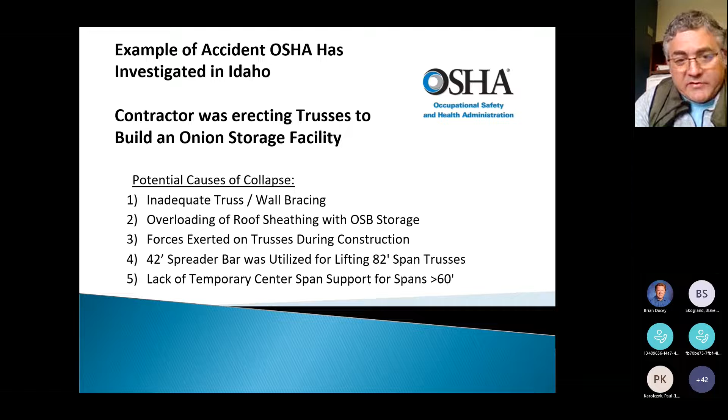The potential causes of the collapse were that they didn't have triangulation in their wall bracing, they overloaded their roof sheathing with OSB, they used a spreader bar that wasn't wide enough for 82-foot spans, and they also didn't have temporary center span supports for the spans.

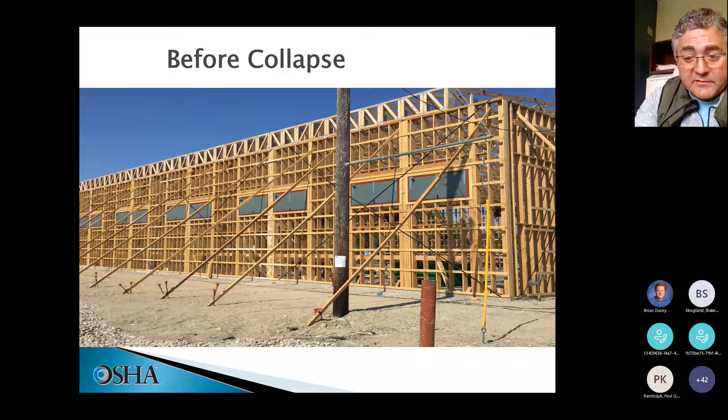This is the after, and for greater perspective, this is the after. For a brief description, there were about 7 people working in this corner of the building. Most of them slid down the structure or crawled around the side. Only one person had a broken hip, so it's not exactly a near miss, but it's pretty close. These guys are lucky that they lived to tell the tale another day.

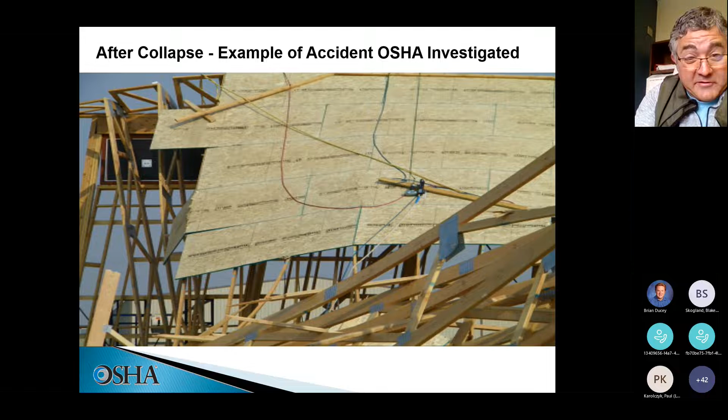So you can see this is a bit of a mess. This is an example of something that we would investigate.

When we have something like that happen, employers are required to report each inpatient hospitalization to us within 24 hours. If you didn't know that, that can be done through our 800 hotline, that's 800-321-OSHA, or you can contact the local OSHA office with jurisdiction.

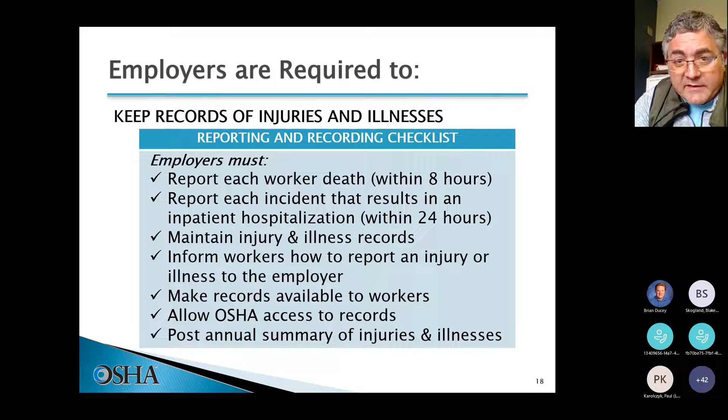Anytime there's a worker death in a worst case scenario, that has to be reported to OSHA or also to a state OSHA jurisdiction. State OSHA jurisdictions, I believe, are consistent with the 8-hour requirement. The DOSH representative could verify this, but that has to be done within 8 hours.

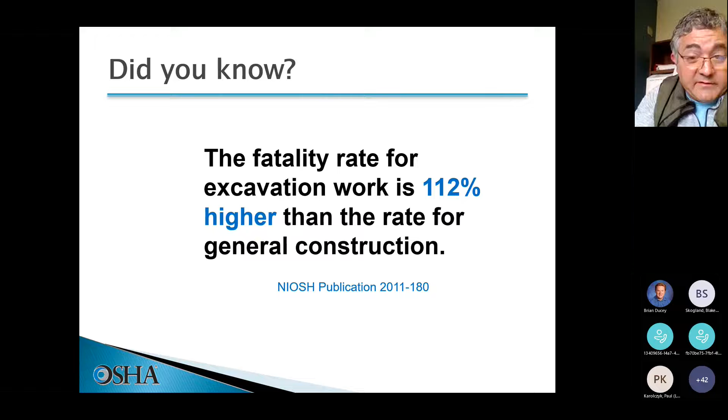So getting to the excavation and trenching portion of the presentation, I'm going to go through these pretty fast because we've got someone from DOSH who's going to talk too. The fatality rate for excavation work is significantly higher than the general rate for construction.

I won't read this whole slide, but note that 271 workers died in trenching or excavation cave-ins over a 6-year period from 2000 to 2006. 488 of those deaths over an 8-year period resulted in, I guess, about an average of 54 per year. 68% of those fatalities were in companies with fewer than 50 workers, and 46% of the deaths occurred in small companies with 10 or fewer workers.

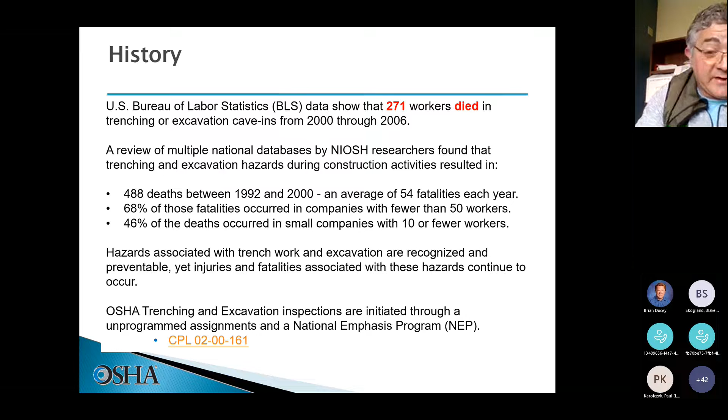OSHA has a national emphasis program, and I have a slide on this, and Blake might follow up on this. The CPL number is 02-00-161, and there is a compliance directive, and I think that has an additional number which I'll reference towards the back.

Some of the common things we hear about when we go out in the field regarding noncompliance are: well, it was just 5 feet deep, or someone was only in it for a minute or had limited exposure time, or that someone was in a hurry.

Other things that we hear are that the trench box or the sloping was not feasible for the site, there was limited access to engineering controls, or that the utility locate was not accurate or completed.

As a brief tangent on that, I once did an inspection on a site where the locate was beyond 21 days expiration, and the contractor hit the gas line while I was doing the opening with the superintendent. That was interesting. Luckily it did not result in an explosion. They were able to call the fire department and resolve the situation, but that was hair-raising.

You want to make sure that there's a competent person on the site to assess cave-in hazards and engineering controls.

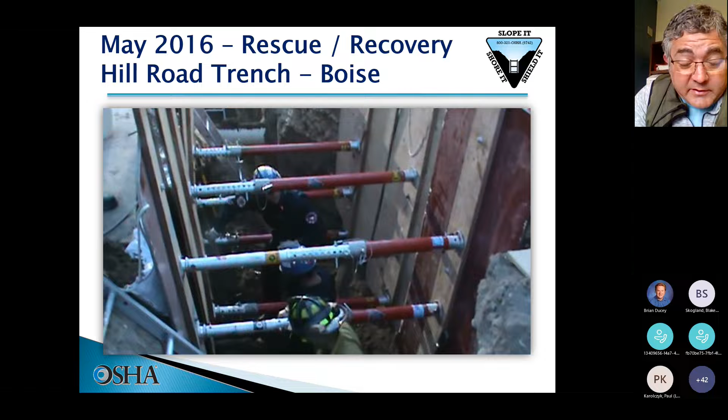This is an after photo of a double fatality that happened on Hill Road in downtown Boise. So they do happen in cities, and in this case this is a rescue crew, and they're trying to rescue the folks that are in this trench here.

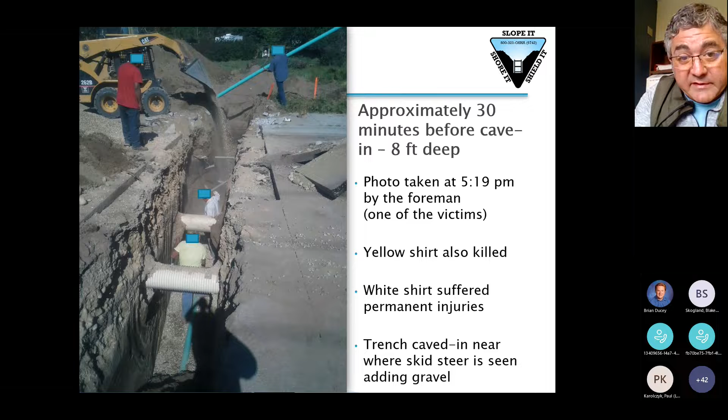I have a series of 3 photos that I'm going to show you that I showed to the DTEC class, to put them in the perspective of what an OSHA compliance officer might be looking at if they're showing up to a site.

This is the first one, and I asked the students, if you're looking in this situation, what do you see? Well, you see that there isn't a ramp or a means of egress or a ladder for this person to get out. The sides may be sloughing off or not properly sloped, and this person is practically being buried by the load.

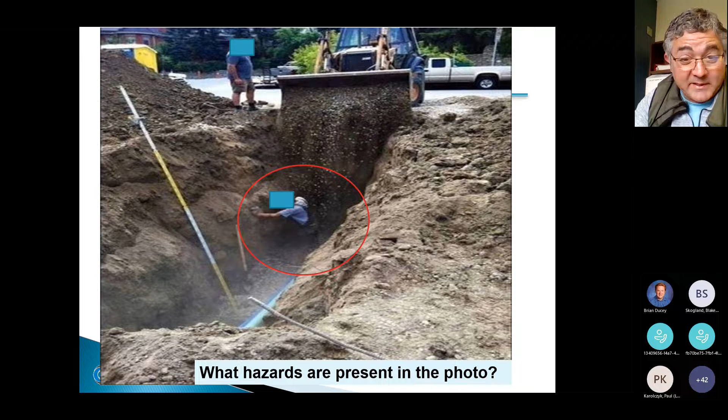So there are a lot of things taking place here. You've got someone standing up top who might be the foreman, who has adequate knowledge as to what's going on. That's going to be the first person the compliance officer wants to speak with, once they get that laborer out of this excavation.

In here, there's some fissuring towards the right-hand side, which might be difficult to see. The soil appears to be a relatively cohesive type, maybe a Class B. If you're not familiar with soil classification, it goes from stable rock to A, being clay or very cohesive, to B, to C being like sand.

But as you go further into this trench or excavation, the slopes get steeper. The difference between a trench and an excavation just has to do with the width of the trench or excavation relative to how deep it is.

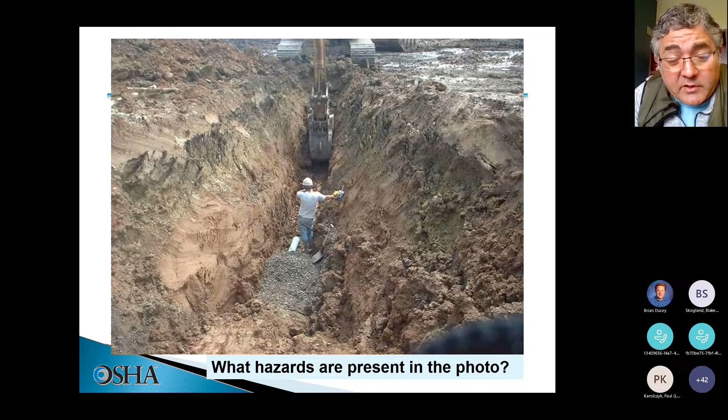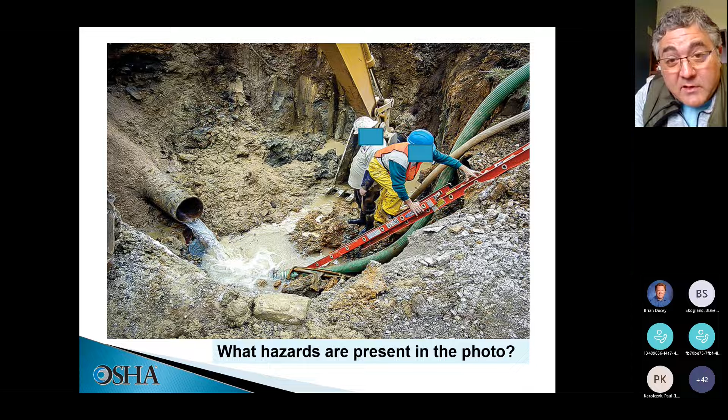The issues in this excavation are that there's patently obvious a bunch of water at its base, and it doesn't look like they have a pumping mechanism—or they may. Actually, it does look like they have a pumping mechanism to get the water out. This could potentially weaken the excavation and make it more susceptible to cave-in.

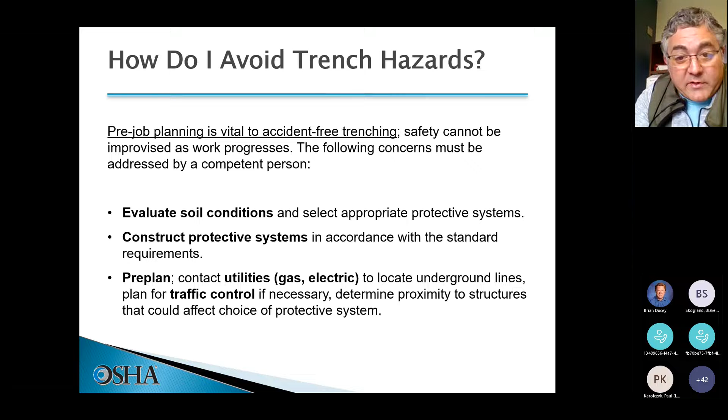So how do you avoid trench hazards? Pre-job planning is important to accident-free trenching. You want to evaluate soil conditions, construct protective systems in accordance with standard requirements, pre-plan and contact utility locate services to locate underground lines, and plan for traffic control if you're in a roadway. You also want to test for low oxygen, hazardous fumes, and toxic gases, especially when you've got gasoline engine-driven equipment running. You want to provide safe access into or out of the excavation.

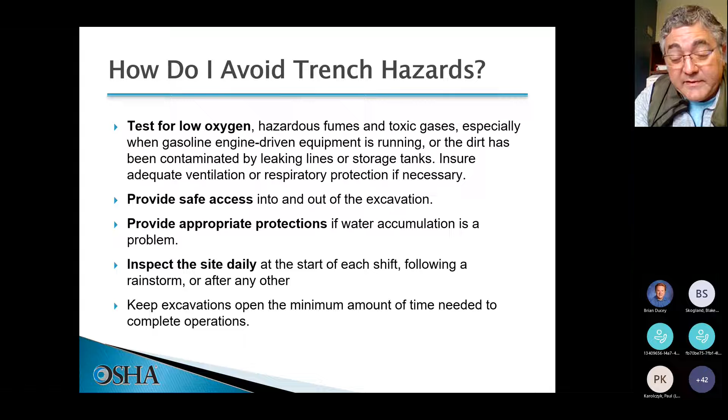Remember that picture where the guy's got a load being dumped on him—there's no ramp or ladder to get out of there. You want to provide appropriate protections if water accumulation is a problem, and make sure a competent person inspects the site daily at the start of each shift, following a rainstorm, or after any other significant event that might affect the cohesiveness or cave-in hazards of that excavation.

A competent person is an individual designated by the employer who is capable of identifying existing and predictable hazards, and hazardous or dangerous conditions involving workers, and who is authorized to take prompt corrective measures to eliminate the hazards. They have to be able to do both: identify problems, and then have the authority to correct them.

Under our excavation standards, the tasks performed by the competent person include classifying soil, inspecting protective systems, designing structural ramps or means of egress, monitoring water removal equipment, and conducting site inspections.

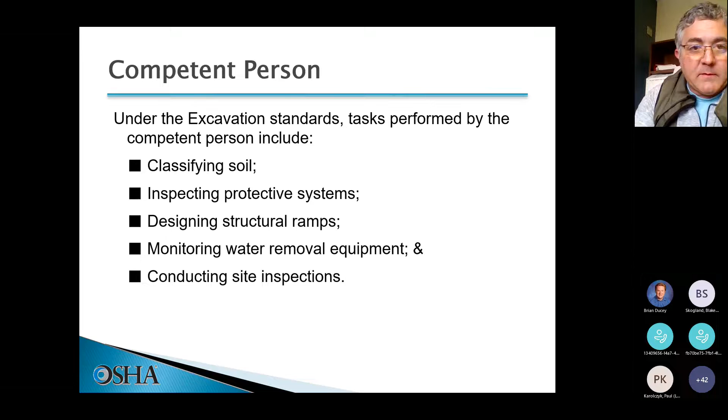So the following slides address cave-in hazards and include photos taken from OSHA enforcement inspections. The industries addressed include residential, commercial, and ag sites.

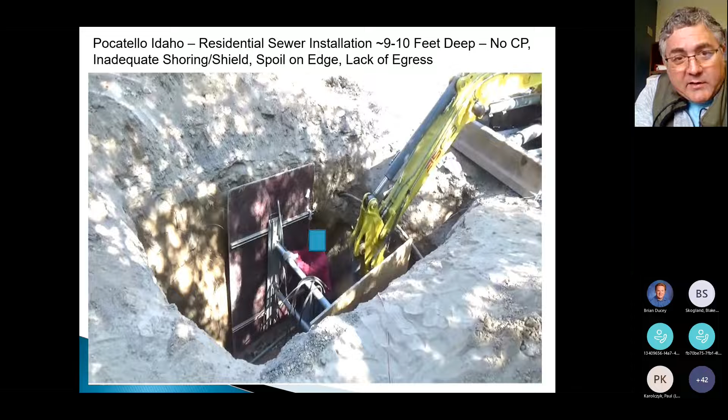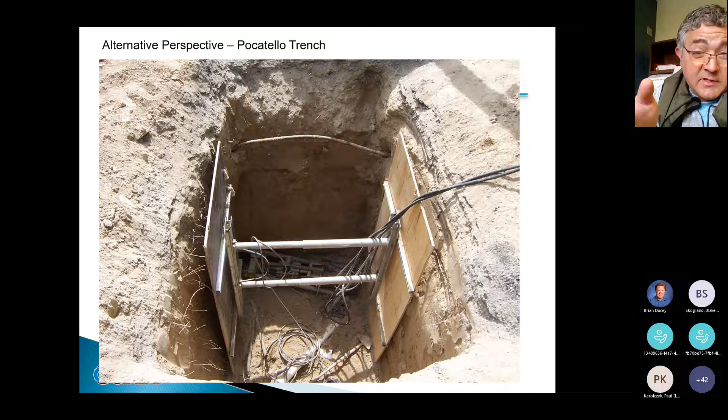There's the slope—or actually the spoil pile—right on the edge here. You can see this worker getting out of the trench; she's like, 'uh-oh, the OSHA guy's here, I better get out.' This is a different perspective. You can see that the opposite sides of the trench are vertical as well, so this is more like a hole, not just a trench. There's a hazard of cave-in from each of the four sides of this work location.

Here you can see the spoil pile, which is significant, right on the edge of this trench. That spoil pile was about 4 to 5 feet high—pretty high, and right on the edge.

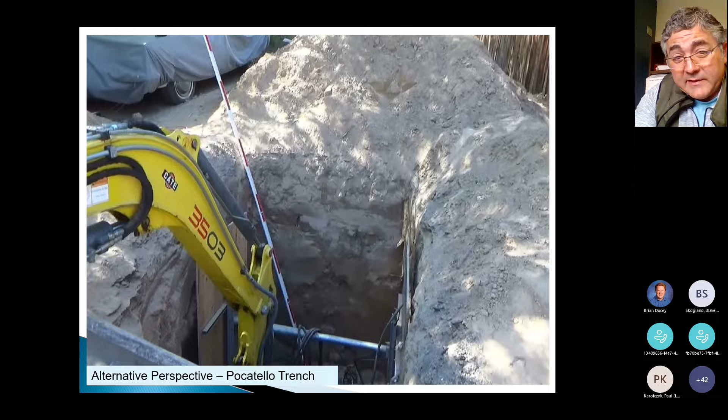This is another excavation on the same site, because they were installing, I believe, residential sewer. It's about 8 feet deep, vertical walls, spoil piles right on the edge. Pretty dangerous—you do not want to go in there. You don't want to send your kids in there. This is a bad situation.

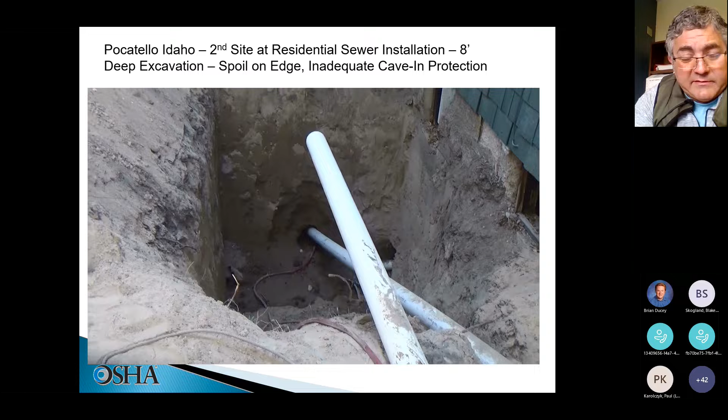This is another site that I inspected that looked in compliance from a distance because they had a shield or a box. But when I got closer, I noticed it was on about a 3.5 foot ledge on the base of the trench, which is a no-no as far as OSHA requirements. These trench boxes need to be no more than 2 feet from the bottom because material can slide underneath it, potentially causing a cave-in hazard.

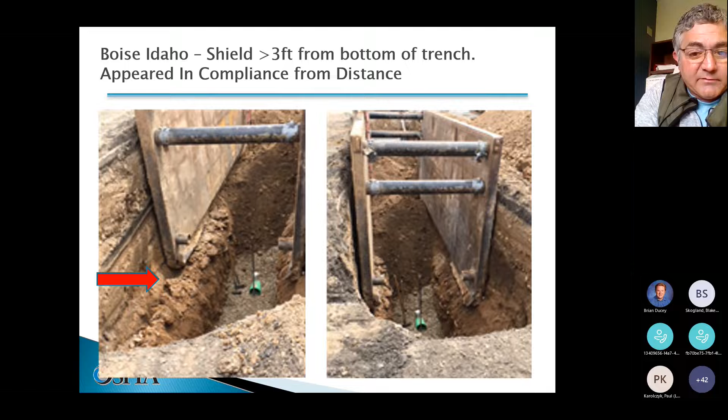This is a double fatality, about 6.5 to 7 feet deep. So they don't have to be terribly deep. In this case, there was an irrigation pipe being placed in the trench or excavation. You can see, looking at the vista, this is actually in the middle of a field in Idaho.

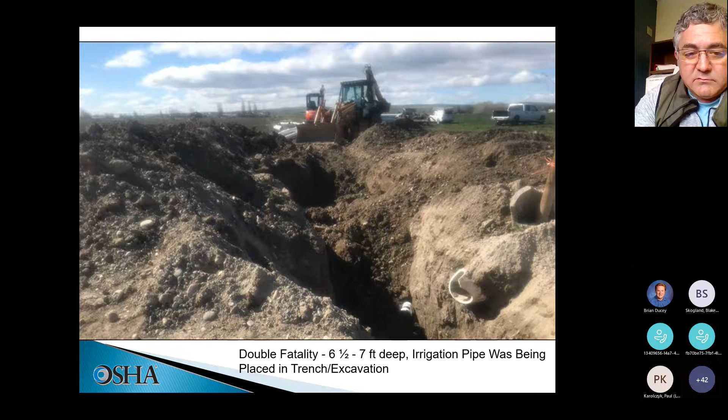This is another fatality. This trench is 10 feet deep. Certainly not something you want to walk into. You can see the spoils right on the edge. In this case, they were installing a drainage pipe, and H2A workers were being utilized on the site.

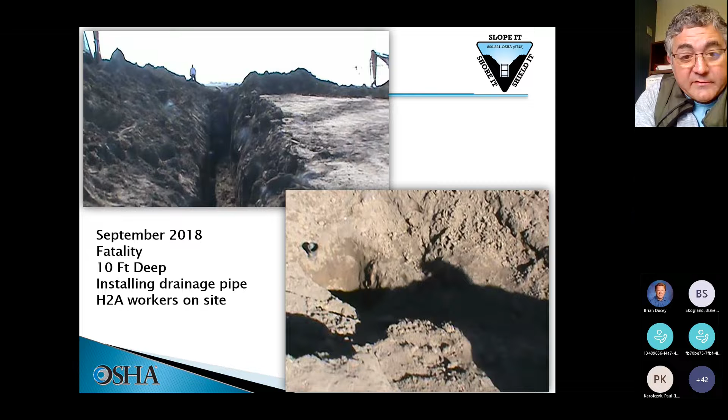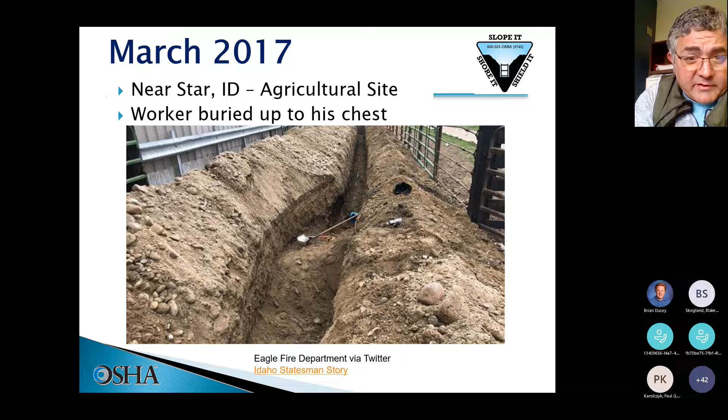Working outside of a box when there's an established engineering control on a trench or excavation site, unfortunately, is something our compliance staff encounters on a regular basis.

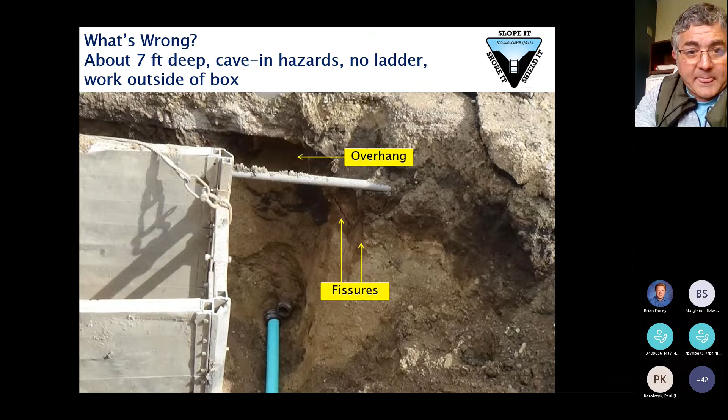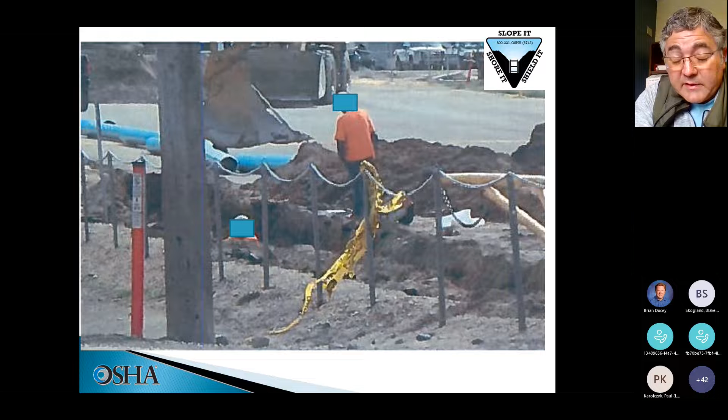This is just a shot showing you the perspective of an OSHA compliance officer. Because of our directive, when compliance staff see someone in a trench like 5 or 6 feet deep, they are obligated to make entry and assess what's going on. So if a compliance officer from OSHA sees this type of situation, they are going to make entry and assess compliance with that situation.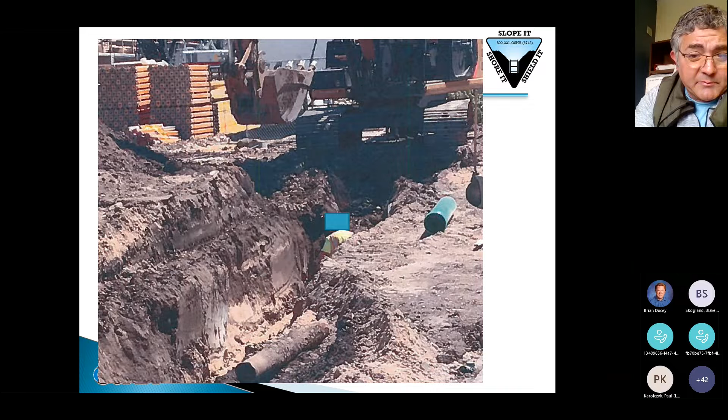The issue here is that someone's working outside of a box. I can't tell how deep it is from the perspective because I got this photo on the internet, but just note that working outside of a box is a potential issue depending on the depth of the excavation or trench at that particular location.

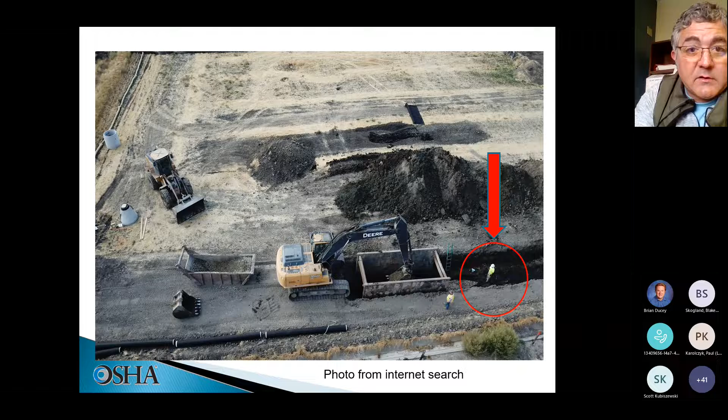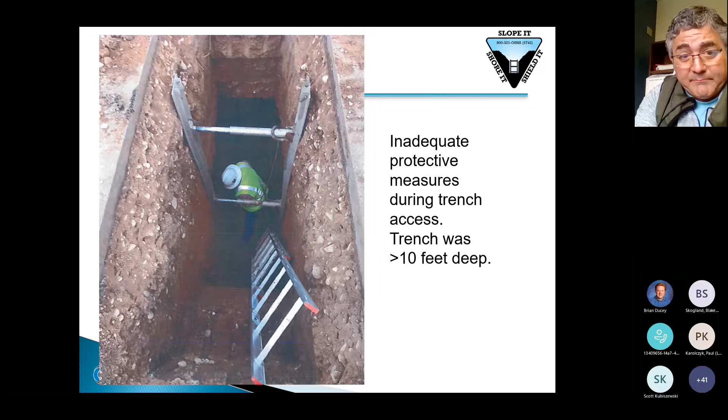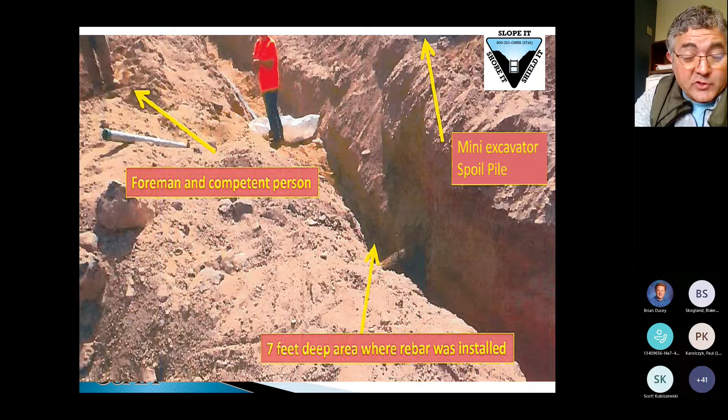In this situation, there's a 7 foot deep area where rebar was being installed. The foreman and the competent person were in view of what was going on. Once the compliance officer got someone out of a hazardous situation, the first thing they would want to do is speak to the foreman and CP about their training and hazard identification for the site.

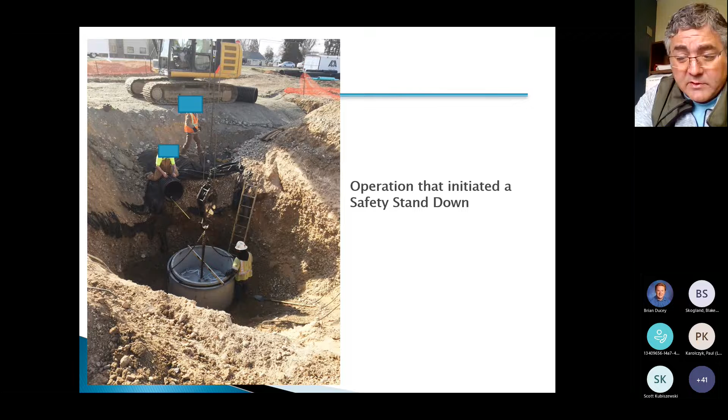This was an operation that initiated what's called a safety stand down in trenching and excavation. This is actually on one of our partner sites, and to their credit, they observed what was going on and didn't like the sloping for the operation towards the far side of the photo. So they stopped all activity on the site, had a stand down with their people, and talked about trenching and excavation requirements. They were proactive, and we would encourage that type of activity with our partners, especially with folks in the community.

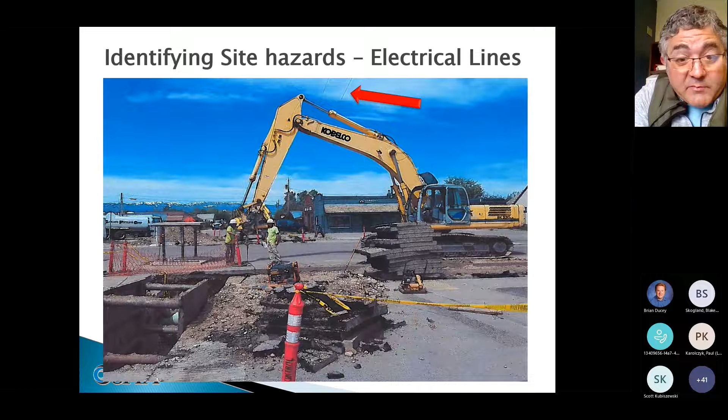It's difficult to see here, but there is an electrical line that runs above the Kobelco there. We would encourage you that whenever you're doing site activity, don't just look down, but also look up and see if there are any primary power lines or things that might cause a path to ground based on the type of operation you're doing.

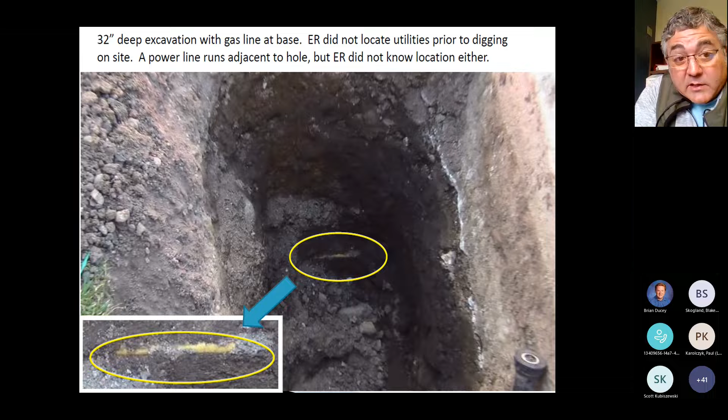It's another inspection that I did, and in this case, the contractor was lucky they were hand digging because they didn't do utility locates prior to the beginning of the job, and they almost broke a gas line, which is indicated with the photo inset here. There's also a power line that runs adjacent to this hole, and they didn't know that location either prior to starting work, so they got lucky. That could have been much worse if they were using power equipment.

On the same site, they tore through all of the irrigation lines on the sprinkler system for this property, so this site was a bit of a mess.

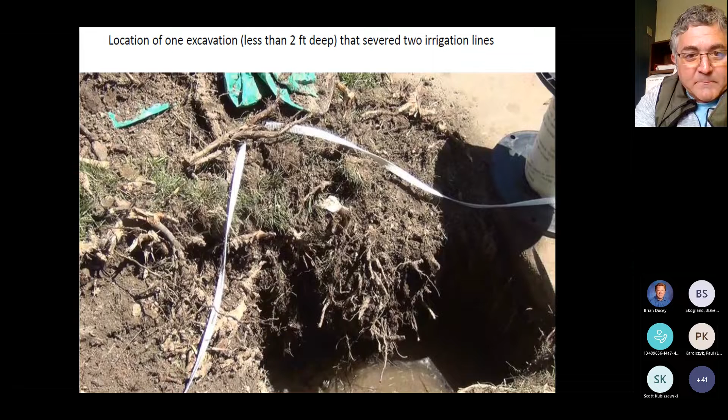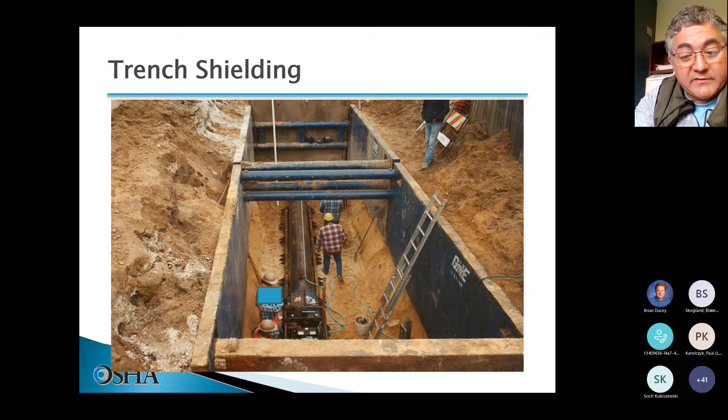This is an example of trench shielding done right, and then you've got some workers in the base of the trench or excavation, and they're properly protected with a means of egress. That's fantastic. Here's the looks of shoring done right.

And sloping. This sloping is for Type C soil for 34 degrees, or a ratio of 1.5 to 1. I haven't seen these site guides in person, aside from this photo, but I'm sure you can retrieve them if you find them useful.

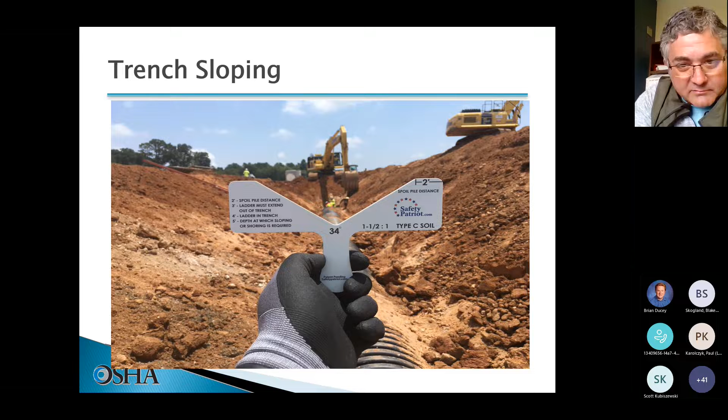Some regulations dealing with trenching and excavation citations are that employees in excavation be protected from cave-ins by adequate protective systems, and that stairways and ladders be utilized if you're 4 feet deep or more, provided for every 25 feet of lateral travel.

As I'm going through these, I'm relaying federal OSHA requirements, so there might be some differences with DOSH. I leave it to the DOSH people to explain that, but I'm just providing this as general information.

Also note that daily inspections are required of excavations, and also you have to move spoil, or the dirt that comes out of the trench and excavation, at least 2 feet back from the edge.

From there, we look at fatalities and catastrophes. Catastrophes are OSHA speak for an incident that results in 3 or more inpatient hospitalizations. From there, we look at complaints and referrals.

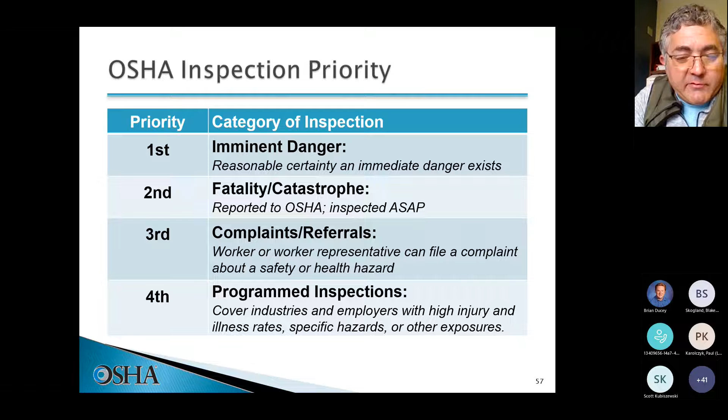And then the last thing we look at are programmed inspections, which are to a lesser degree with trenches and excavations because it's a little difficult to predict.

These are our citations and penalties, and I won't read you the whole slide, but just know that willful is the worst. Willful is when an employer intentionally and knowingly commits a violation with plain indifference to the law, and those penalties can be up to $145,000.

Serious violations, which is the most common, are where there's a substantial probability of death or serious physical harm, and those penalties can be up to $14,500. There are multiple reduction factors that go into penalty assessments - that's a topic for another day.

The current NEP on trenching and excavation has this line about compliance officers initiating inspections under the NEP whenever they observe an open trench or excavation, regardless of whether or not a violation is observed. So again, if our compliance staff sees something like this ongoing, they're going to make entry.

We initiated a compliance directive in July 2021, which updated our procedures and reviews how we take documentation - photos, sketches, samples, measurements - how we analyze employee exposure, and also what we look for within excavation protection programs.

What we would expect to see in excavation protection programs, discussed in directive 02-00-165, is that you have a safety and health program that addresses accident prevention and excavation hazards, that you have a system to track compliance in Subpart P for OSHA excavations, which includes periodic inspections, and a disciplinary system to make sure people comply with work rules. It addresses training, who the competent person for the job site will be, and any engineering assessment of near misses and injuries that occur.

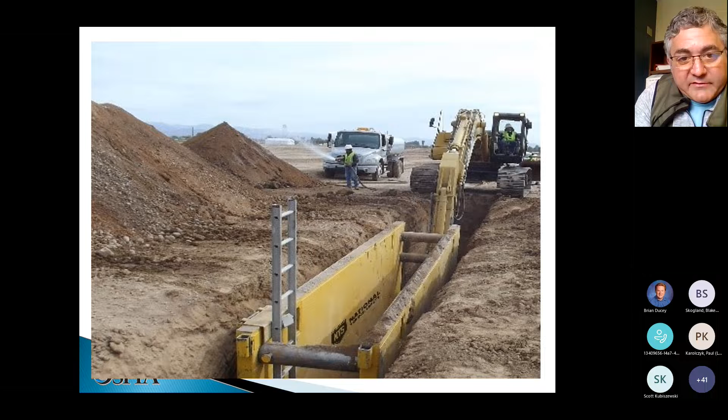So, this is an example of just a good picture, right? You've got a box in the trench with a way to get out, spoils well back, and this is from our e-tool, which is available online.

And that's basically my portion of the presentation on trenching and excavation. Before I hand it back off to Blake for his discussion on emphasis programs, let me get my...

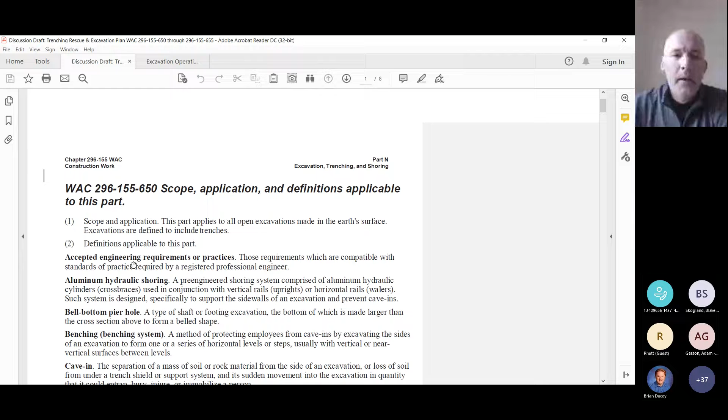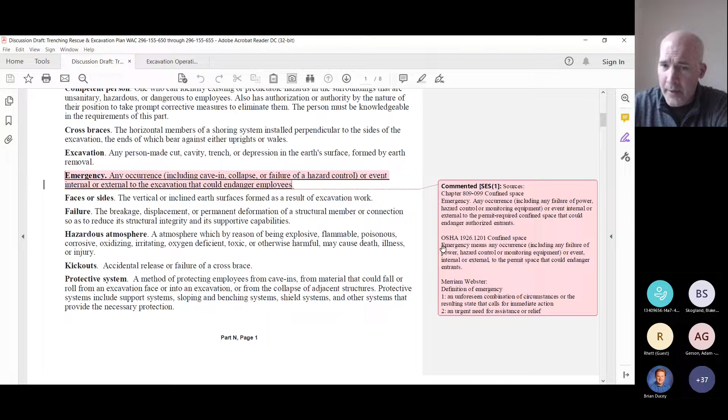In 650, we added 2 new definitions: definition of emergency. We get the definition from our confined space standard, from OSHA's confined space standard, and also to some degree the dictionary. We find it important to define words where a dictionary may give us a lot of different definitions.

So we did add emergency in there. I'm going through this fairly quickly to get everyone on their day, but happy to answer questions.

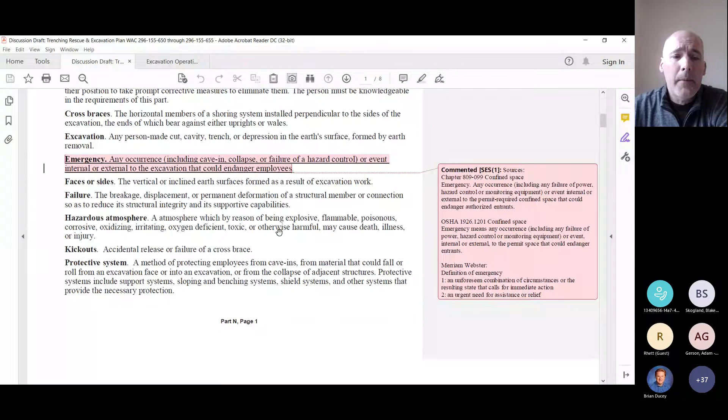Another definition that we added was rescue, and that came from our confined space standard, though slightly modified because it talks about permit space, and obviously we're not talking about a confined space with a trench, but slightly reworded, from federal OSHA's confined space standard, and to some degree also the dictionary.

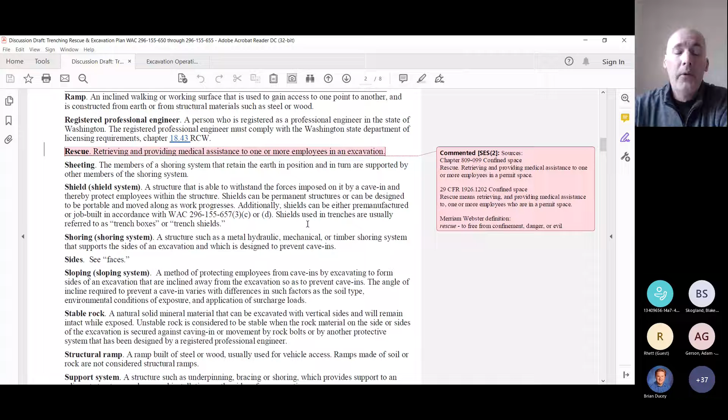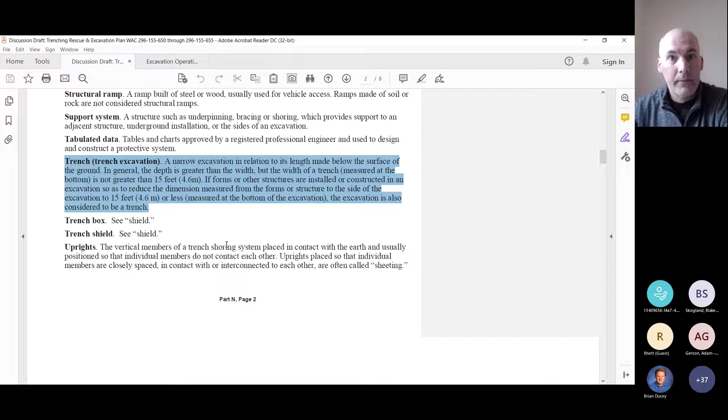So where we see it underlined would be new, or if it isn't underlined, at least in this section, it's existing language. As Adam had mentioned, a trench excavation has a specific definition in the standard. This isn't new, it's been there for a long time. Much of what we're going to talk about is going to be specific to trench excavations, and that differs from just an excavation, but that's not changing. Just wanted to highlight that.

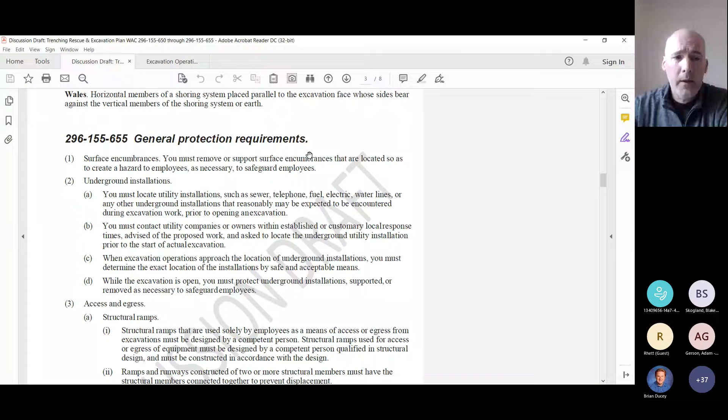So section 655 is the general requirements that apply to all excavations. We can see that none of that is changing, 1 through 12. It's been there as it's been written, I think, since 1991 in Washington, substantially similar, though not exact, to OSHA's standard. And we can see as we go down, we do have a new number 13, potentially a new number 13, and we have some language over here off to the side.

So number 13 will apply to all excavations. Management wanted to address rescue and procedures for an employer to follow prior to employee entry. The standard language we're looking at is: you must plan for and provide, or make arrangements in advance with locally available services to provide prompt, safe removal or rescue of employees in the event of an emergency.

And that language came from a couple of different places currently in chapter 155. So 155 currently has prompt, safe removal from elevated locations and trenches and excavations, and also under accident prevention program, proper actions to take in the event of emergencies. Largely, it's already there, but we wanted to make it more specific to excavations instead of piece it here and there, bring it down into that standard.

Okay, so number 14 is all new as well. Again, don't worry about the colors, just number 14 is all new, and we can see that it's specific to trench excavations. The reason why we're looking at something more specific to trenches versus all excavations, and why the standard differentiates between them, is proximity to the hazard and an ability to escape.

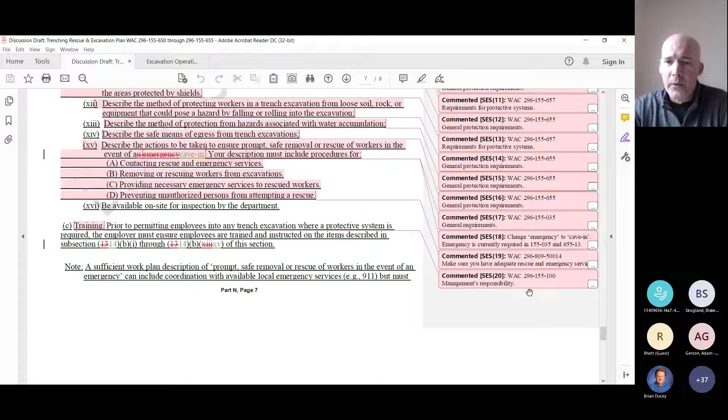Be available on site for inspection by the department. And C is new to this: prior to permitting employees into any trench excavation where a protective system is required, the employer must ensure employees are trained and instructed on the items described in this plan. And we have, kind of, where we get those sources - it's management's responsibility to provide training of employees. So that's the idea of the plan and where we're going with it.

I'm going through it fairly fast because I know it's been over an hour.

And so what I can do now is have Kevin Walder, a regulations analyst who's done a lot of work with all the rules we work on, give an update on where we are with it, where we're looking at being, and the next steps for your involvement.

All right, thanks, Eric. My name is Kevin Walder. Like Eric said, I'm an administrative regulations analyst with DOSH. So my role basically is to shepherd rulemaking projects through the administrative process until they are adopted and become effective.

In Washington, rulemaking is a 3-part process. We have a preliminary stage where we file a CR 101, and that's where we do the bulk of the drafting with stakeholders, and that's where we've been with this project. We filed the CR 101 back in June, so we're coming up on almost a year. Over that time, we've had 3 public stakeholder meetings and also multiple opportunities where we sent out a draft rule and requested feedback via our Gov Delivery email service.

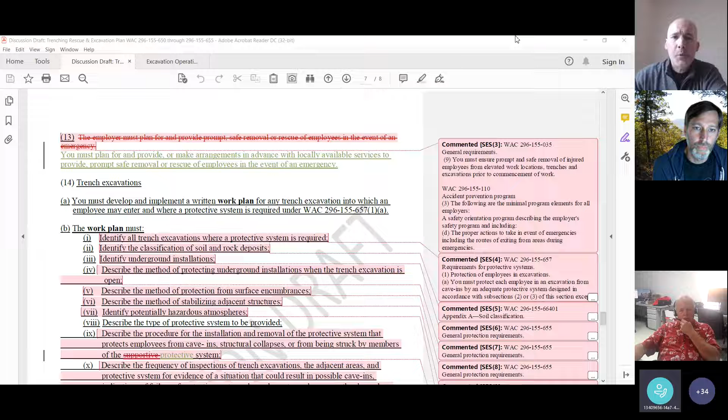Thank you. To some degree, yeah. And we saw with a lot of these where I referenced back to Chapter 809, confined space. We are incorporating a lot of those same confined space, not only language, but also requirements, just making them specific to excavations. To require a specific permit, I'm not sure if we've really discussed that, but requiring a written plan largely does the same thing. And a lot of those elements are the same as confined space. And we know that a trench isn't a confined space, right? Good. But a lot of those are the same, and we've applied that same rationale and language here.

But a specific permit like a confined space, we haven't really looked at that, no.